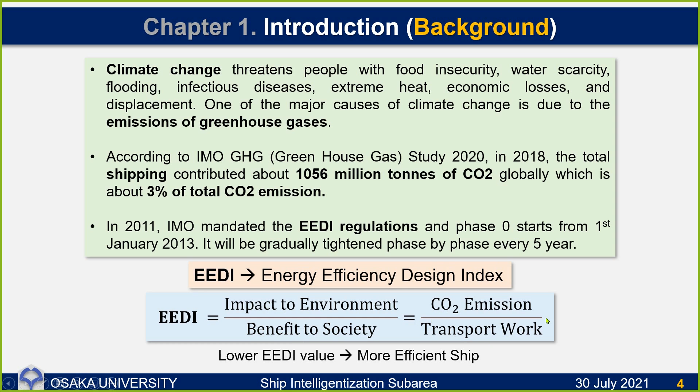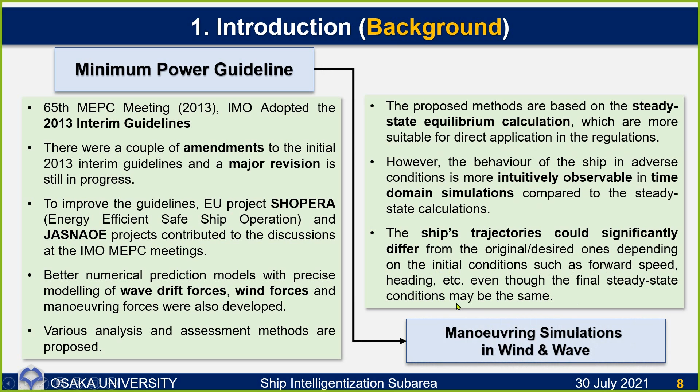Better numerical prediction models with precise modeling of wave drift force, wind force, and maneuvering force were also developed. Various analysis and assessment methods were also proposed. The proposed methods are based on steady-state equilibrium calculation, which is more suitable for direct application in regulation. However, the behavior of the ship in adverse weather conditions is more intuitively observable in time domain simulation. Moreover, the ship trajectory could significantly differ depending on the initial condition, like forward speed and heading, although the final steady state condition may be the same. Therefore, maneuvering simulation in wind and wave becomes important.

Now, chapter 2, maneuvering model. For the maneuvering model, a modular modeling approach is used. The ship is divided into different systems: hull reaction forces, steering system, propulsion system, as well as environmental wind and wave forces. Because this is a modular modeling approach, each system can be updated and replaced if a more accurate method becomes available. I also included the engine in the ship navigation control system, which will enable a wide range of maneuvering simulation scenarios.

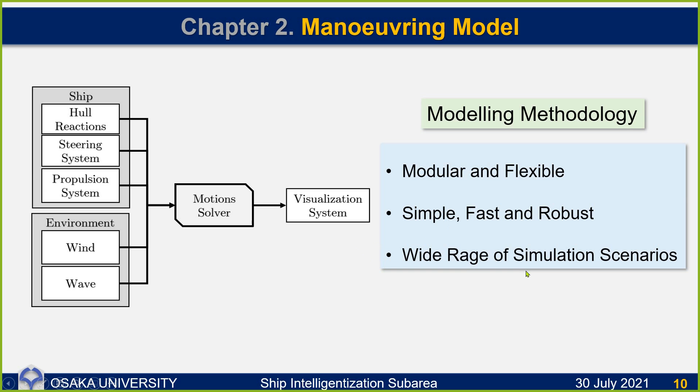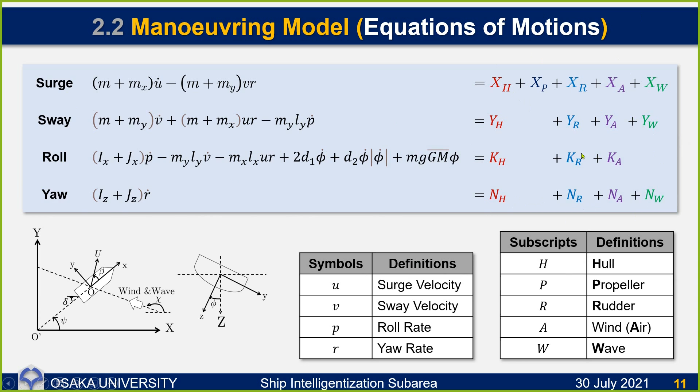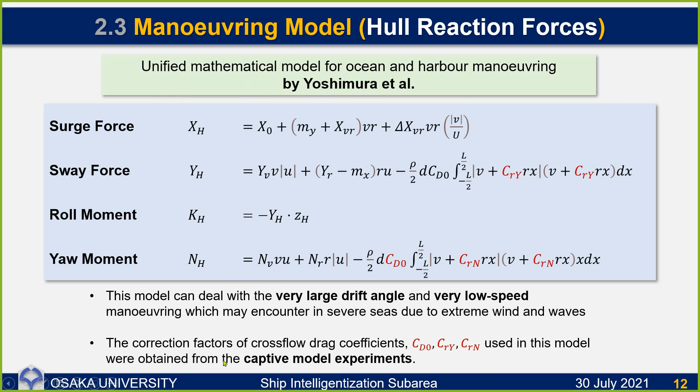This shows the 4DOF MMG equation used for the maneuvering model. Now I will explain the force and moment components on the right hand side. For the hull force and moment, the unified mathematical model for ocean and harbor maneuvering proposed by Professor Yoshimura is shown here. This model can deal with very large drift angles and very low speed maneuvering, which may be encountered in severe sea conditions. The correction factor for the crossflow drag coefficients used in this model was obtained from captive model experiments.

This shows the arrangement of the propulsion system and the propeller. The propeller module generates thrust as shown here, and the propeller is connected to the engine via a shaft, with the engine controlled by a governor. The operator specifies the desired RPM here. The governor also includes a fuel limiter, which ensures the engine operating point stays within the specified limit. The shaft dynamics equation is shown here.

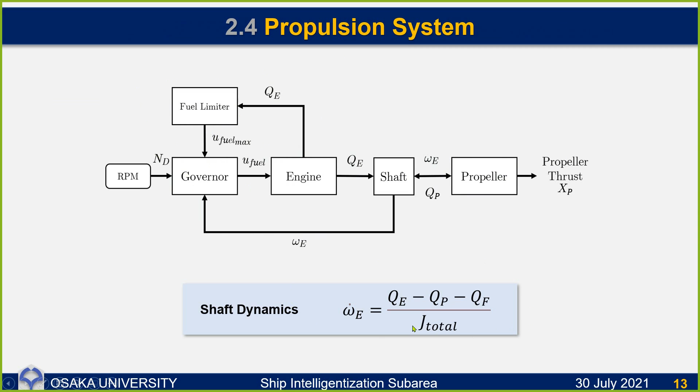Propeller thrust and propeller torque are calculated from the open water propeller chart as shown here. For the engine torque, it is shown that the engine torque is proportional to the amount of fuel supplied into the engine, and the proportional coefficient can be calculated from the specified MCR point as shown here. The friction coefficient is shown and is negligible.

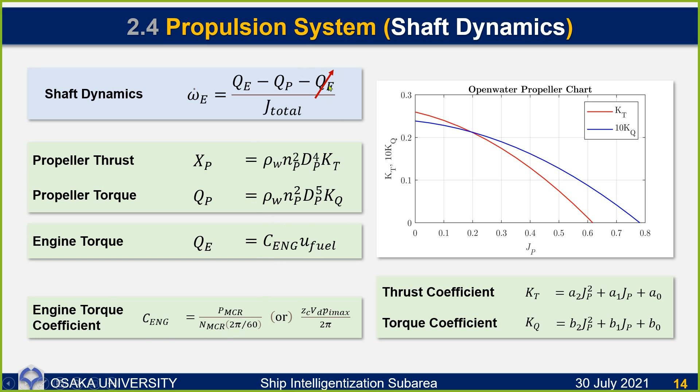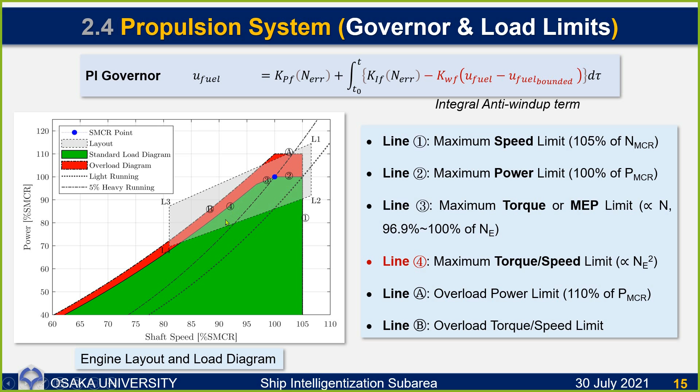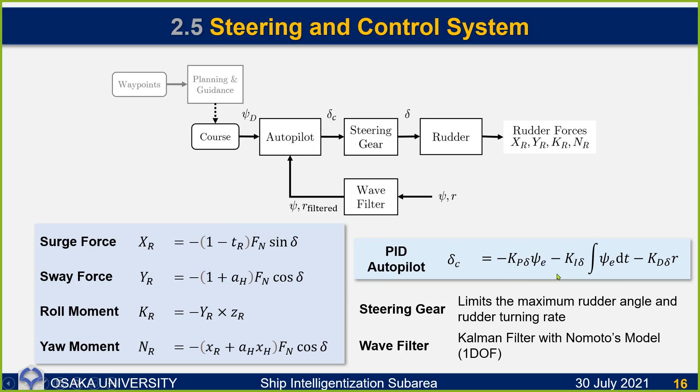For the environmental force, first the Beaufort number is defined here, with corresponding wave height and wind speed given in this table. In the environmental force, wind force and wave force are considered. For the wave forces, there are two components.

The first is the second order wave drift force, and the second is the first order wave force, which is the oscillatory motion.

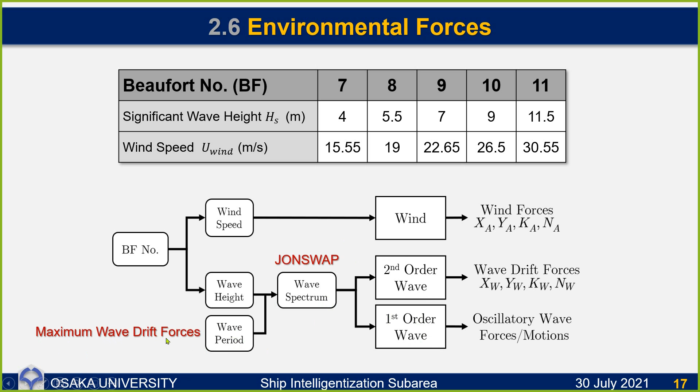For the wave spectrum, the JONSWAP spectrum is used. For the wave period, the period is chosen at the maximum wave drift force around the healthy condition.

This shows the wave spectrum here. For the directional spectrum, a cosine square function is used.

Wave forces are calculated for both long-crested and short-crested waves. But when comparing these two forces, the long-crested waves are larger, so for the simulation, long-crested wave force is used.

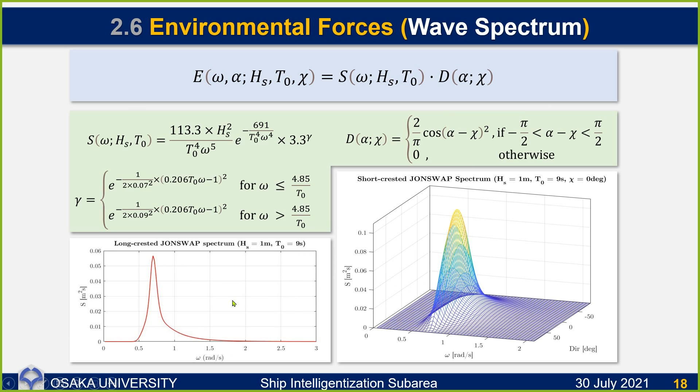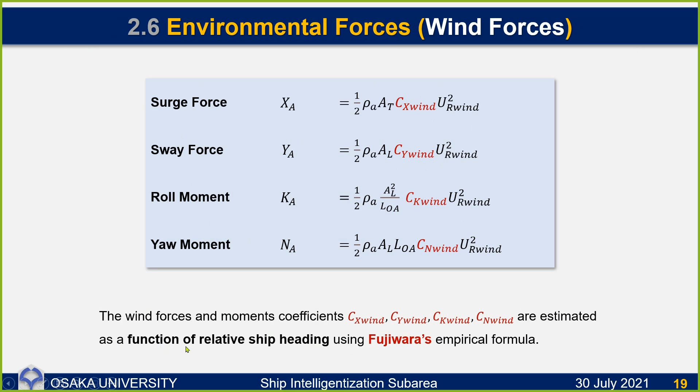For wind forces and moment, these equations are used. In this equation, the wind drag coefficients are estimated as a function of relative ship heading using the Fujiwara empirical formula.

For the wave drift forces, they are calculated assuming they are proportional to the square of the wave height, as shown here. This is the wave spectrum, and this is the wave drift force in regular waves, which is then integrated over all frequencies and directions, as shown here. The irregular wave drift force is calculated here.

For the second order forces, the wave drift force uses slender body theory with a Kochin function, calculated by the strip method. For sway force and moment, I use the linear 3D panel method with the Green function for zero forward speed.

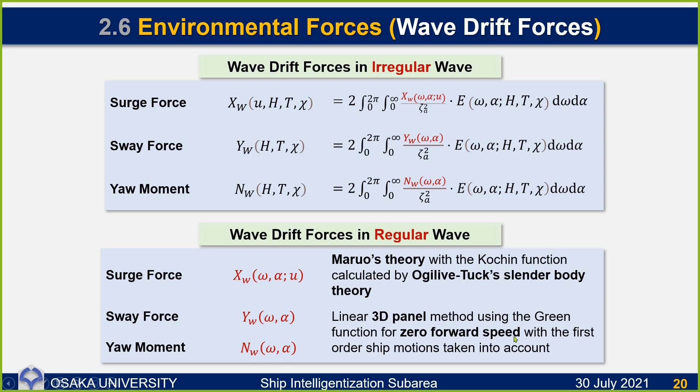For the first order wave, instead of using the first order wave forces directly, I use the first order wave motion, because these are linear forces and motion RAOs are readily available. Using the wave information and the motion RAO data, the first order wave motion in six degrees of freedom can be calculated using the superposition of different contributions from different wave frequencies.

For the propeller and rudder emergence, from the previous information I can obtain the ship motion of the center of gravity. By using this information, I can obtain the instantaneous propeller and rudder position.

Moreover, I can obtain the wave elevation at the propeller and rudder location using this equation. By using this information, the amount of propeller and rudder emergence above the water can be calculated, after which the thrust and rudder force reduction factors can be obtained.

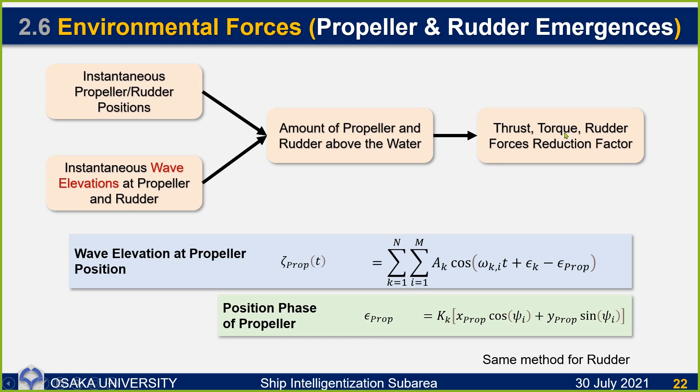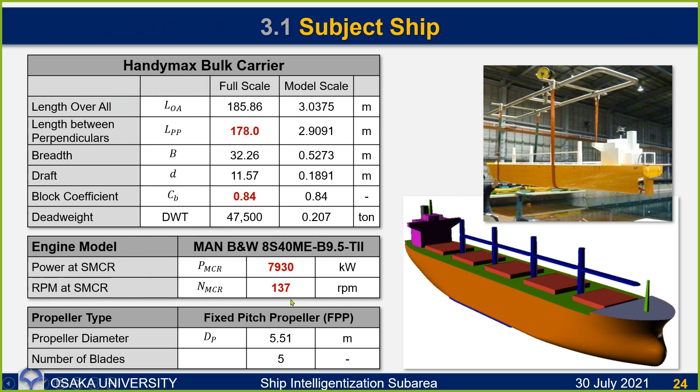Now, subjects in the validation. The subject in this study is the handymax bulk carrier, and the hull form of this ship originated from the KVS62, which is modified to have a block coefficient of 0.84. The engine used for this ship and the propeller are given here.

First, validation. I will show the validation at zero speed and propulsion equilibrium, and the validation is only done in the surge equilibrium.

Because of this oscillation, I consider the rudder thrust to be around 10% of the propeller thrust.

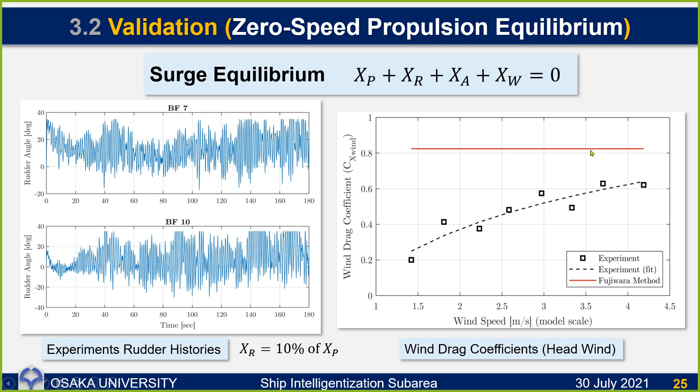For the wind forces, this shows the measured wind drag coefficient compared with the Fujiwara empirical estimation. The Fujiwara empirical estimation is more conservative here.

This shows the result of the zero speed equilibrium RPM for different weather conditions. For wind force and moment, I used the measured parameter for wind drag coefficient, as well as both Fujiwara and the experimental fit, as shown here.

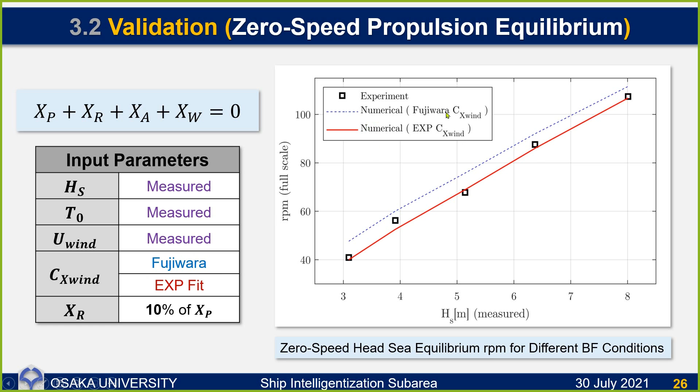The numerical result with the experimental wind drag coefficient shows good agreement, and as expected, the Fujiwara coefficient gives a slightly more conservative result.

Now, validation for the first order wave motion. To validate the first order motion in irregular seas, I selected one of the previous experiments. This experiment was not specifically designed for this purpose, but I selected it to show some validation of the first order wave motion.

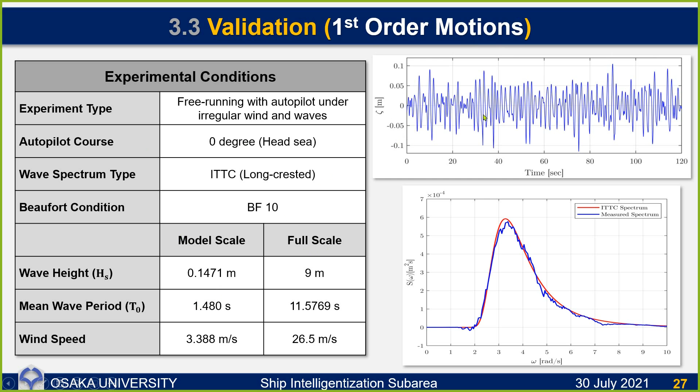This is the wave elevation history during the experiment, and this is the wave spectrum.

This is the trajectory of the ship during the experiment. The autopilot heading was specified at 0 degrees, but as you can see here, the actual heading is not 0 degrees.

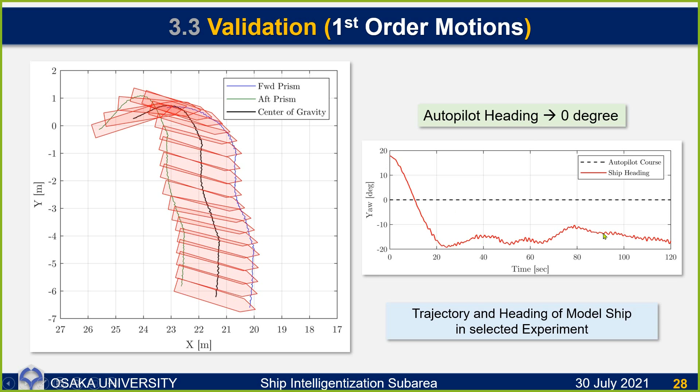This shows the validation of the heave motion here. It shows good agreement between the experimental heave motion and the heave motion calculated from the motion RAO.

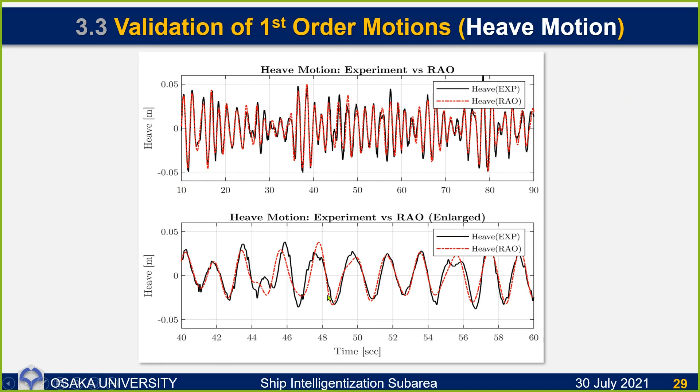This is because the RAO motions are calculated without the rudder, and also during the experiment the rudder was oscillating, as I showed previously. This discrepancy might be due to that.

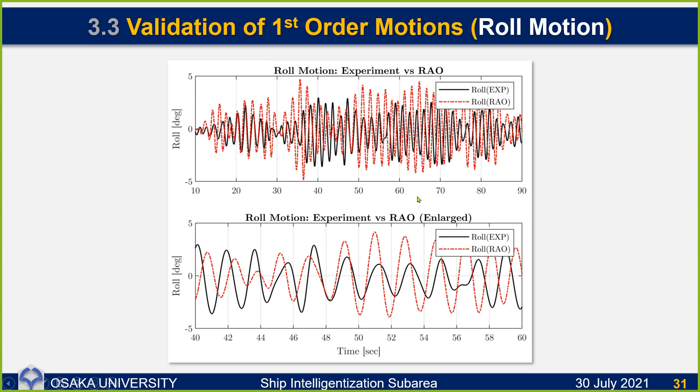Now I will show you the maneuvering simulation. The first scenario is inspired by the grounding accident of the Pasha Bulker at Nobbys Beach, Newcastle Port.

Before the accident, the ship was at a beam sea condition, and then the shipmaster tried to turn to head seas to avoid the grounding, but it was unable to turn and finally grounded.

In the simulation, the ship will start at the beam sea condition and turn to head seas using the autopilot. I executed 4 different types of comparative simulation.

The first compares with and without propeller and rudder emergence. The second compares different weather conditions. The third uses different initial forward speeds. The fourth compares different engines.

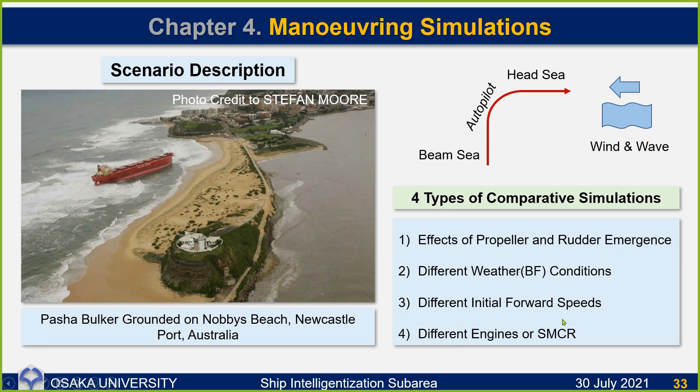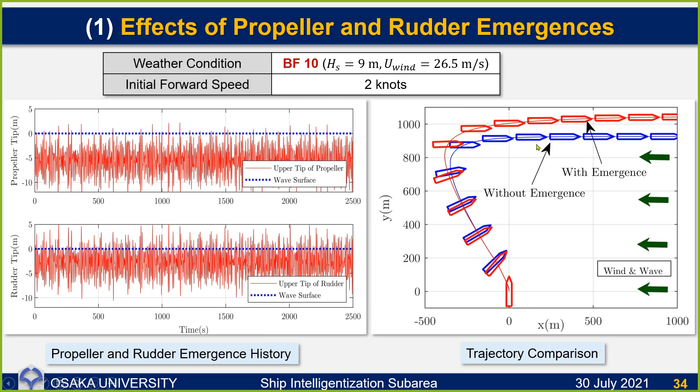But if you look at the ship speed, it is not too much different, because the propeller emergence is not severe — only the trajectory shows the difference.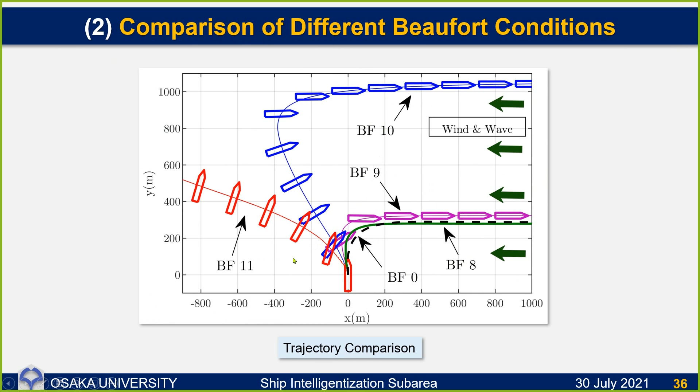At Beaufort 10, there was significant drifting. At Beaufort 11, the ship was unable to turn to head seas.

If you see the ship speed graph here at the Beaufort 10, even though it was able to turn to the head seas, the speed is nearly 0. In the Beaufort 11 condition, regardless of the maximum rudder effort, the ship was unable to turn.

If you see the engine power develop graph here, in the Beaufort 10 and 11 the engine power developed is smaller than other weather conditions, because in this condition the loading on the propeller is very high, and also the engine limit at this propeller RPM is lower, so the fuel limit is lower than other conditions.

This shows the effect of initial forward speed in the time domain simulation. So in this simulation, I started with different initial forward speeds and did various simulations. In this condition, it showed that depending on the initial forward speed, the ship trajectories are significantly different.

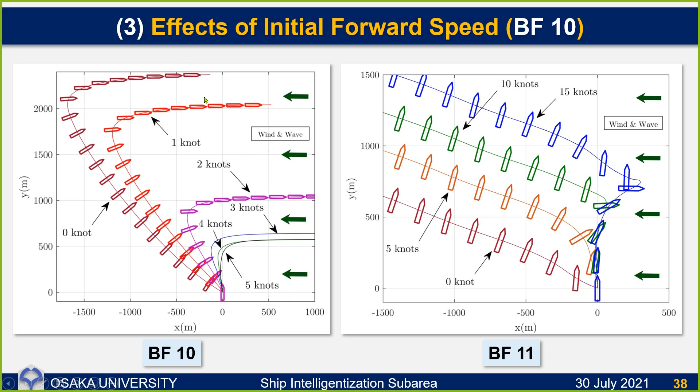But if you compare the ship forward speed at the final condition, they are exactly the same. So if the ship is operating in restricted water, this might have a significant impact. In the steady state calculation, this won't show this kind of result.

Another one is the fourth simulation. For the fourth simulation, I compare 4 different engines, with 3 additional engines shown here. The first one is the original engine, which is optimized for the original design speed. It has the 5% light running margin. It is shown as the blue dot here.

What is the light running margin? Light running margin is the light reserve engine power for the heavy loading condition. And this is the light running propeller curve. The original engine is chosen like the 5% from the light running propeller curve.

And then the second engine has the highest power within this layout diagram. This dotted line shows the layout diagram. When the base engine model is selected, the layout diagram is fixed. You can choose any MCR point within this layout diagram. For the second engine, I choose the highest MCR point here.

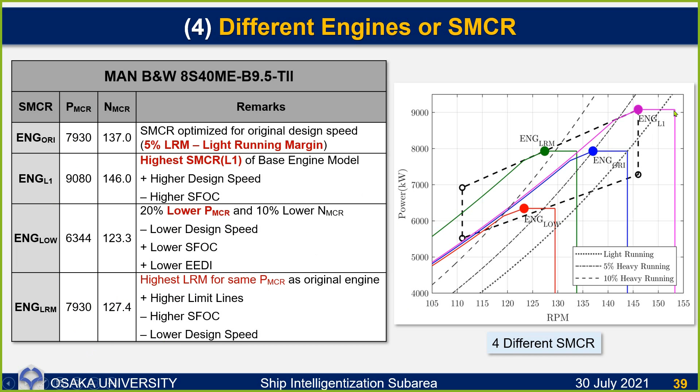The third engine has lower engine power, 20% lower than the original engine. I choose this engine because, due to EEDI regulation, a designer may decide to reduce the propulsion power. The 4th engine is the highest - it has a higher light running margin, and it has the same power as the original engine. It has the maximum distance from the light running margin as shown here.

This table shows the comparison of the EEDI value and the light running margin for the 4 different engines. The lower power engine has the smallest EEDI value as shown here, and the higher power engine has the higher EEDI value as shown here. The 4th engine has a slightly larger EEDI value than the original engine because, although they have the same power, the higher light running margin gives it higher specific fuel oil consumption. If you compare the light running margin, this one has the highest.

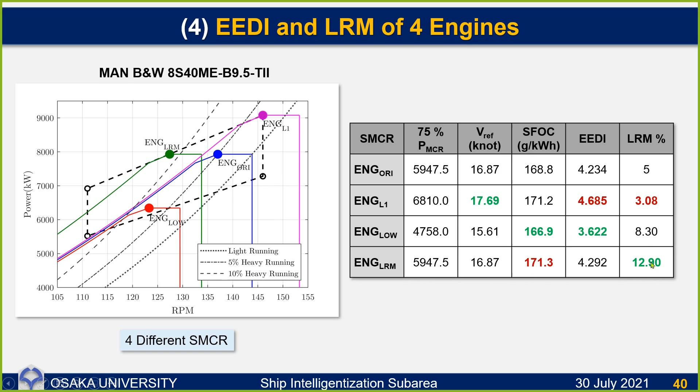So this is the simulation result, using different engines here. The blue line shows the simulation with the original engine, and this one shows the higher power engine. It has a little better trajectory here.

The lower power engine cannot maneuver the ship to the head sea, as shown here. This engine, with the highest light running margin, shows the best and safest trajectory here. This engine and the original engine have the same engine power, but because of the higher light running margin, this shows a safer result here.

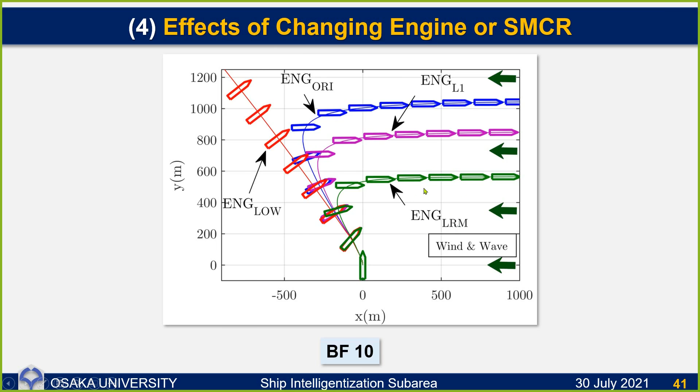This shows the time series - if you check the ship speed, the ship with the engine with the higher light running margin has the higher speed among all the engines, as shown here. Also for that engine, the RPM can reach up to the specified RPM, and there's not too much deviation.

The engine operating point is within the limit all the time. For the other cases, like the original engine and the higher engine power, because of the lower engine envelope and lower engine limitation, it cannot use its full power, as shown here.

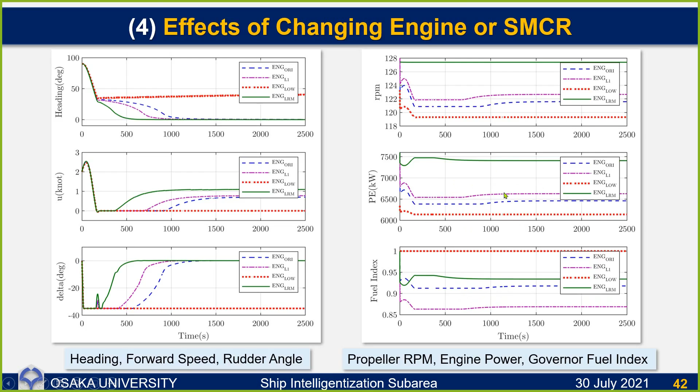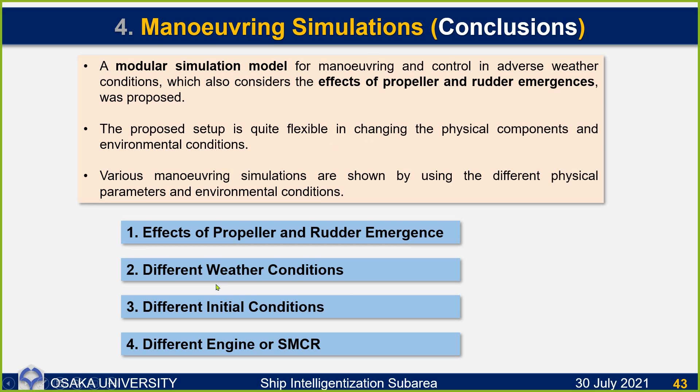So this is the conclusion for the maneuvering simulation. A modular simulation model for maneuvering control in adverse weather conditions is developed, and the effects of propeller and rudder emergence are considered. The proposed model is also flexible in changing physical components and environmental conditions. Various maneuvering simulations are executed with different physical parameters and environmental conditions. 4 different simulations are done.

When comparing the effects of propeller emergence, the ship speed is not significantly affected by the emergence because the emergence events are not very frequent, but there's some difference in the trajectory because of the rudder emergence.

Engine overspeeding doesn't occur because the governor was fast enough to compensate for the sudden engine speed jump. Engine overspeeding is more likely to occur in beam and stern quartering waves, because in heavy waves the propeller RPM is already low due to heavy loading, so overspeeding is less likely.

All these simulations are done under the ideal condition with the simplified model. So, I cannot take account of all the possible effects, especially the engine dynamics and something else. So, in the real situation, there may be some differences.

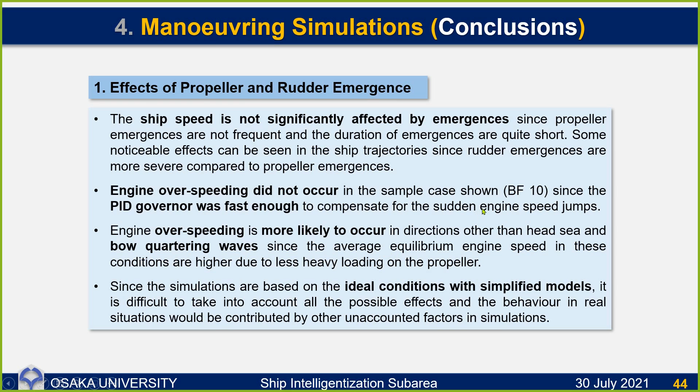For the different weather conditions, the ships were able to turn to the heading up to the Beaufort 10 condition, but with a very small final speed. In this situation, in the real situation, the rudder angle will be controlled by the human with discrete form, and the exact wind direction is not easily accessible. In this case, the human control will be less efficient.

When comparing the different initial conditions, even though the final steady states are safe, the ship trajectories are significantly different. So if I use different initial headings, the ship trajectory also will be more or less significantly different.

Therefore, when assessing the safety of the ship in adverse weather conditions, not only the equilibrium ship speed, but also the ship trajectory is important, especially when the ship is operating in a restricted area.

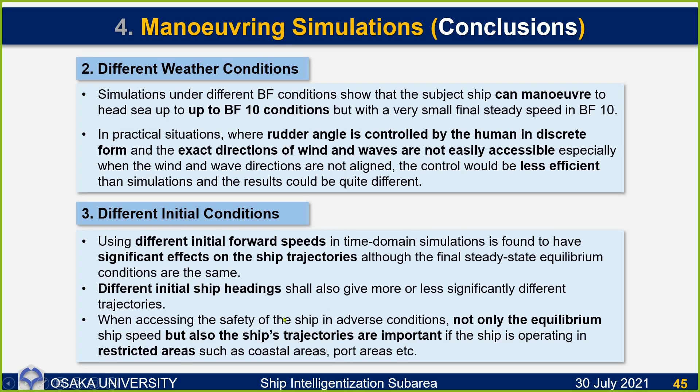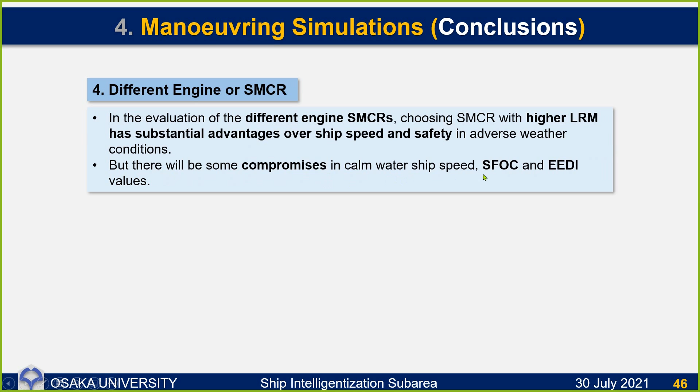When comparing the different engine or SMCR points, the engine with the higher LRM gives substantial advantages over the ship speed and safety, but there will be a compromise in the ship speed as well as fuel oil consumption and the EEDI value.

Now the second part. In the second part, I studied the ship automatic control strategy. In adverse weather conditions, the ship is usually controlled manually, but the manual control is not very precise. So in some cases, automatic control will be more efficient.

In this study, I studied 3 different control strategies: first, heading autopilot alone, then path following guidance, and then optimal path planning. First, autopilot alone.

This shows the setup of the autopilot control alone. The autopilot will calculate the rudder angle for the ship, and the operator will specify the desired heading.

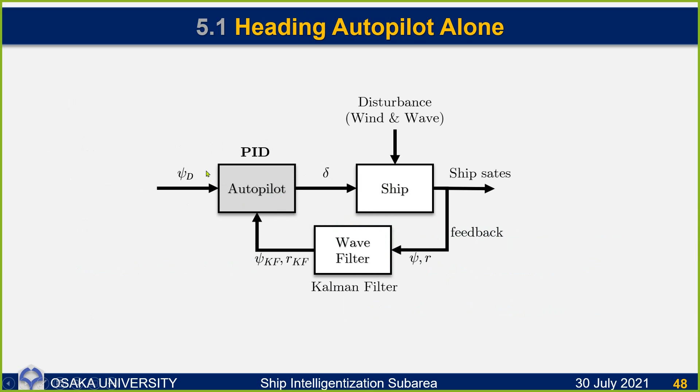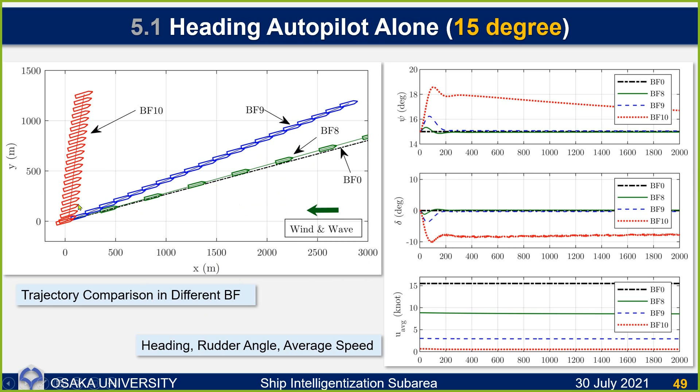This shows the simulation result of the autopilot alone for the course keeping maneuver, under the different weather conditions. Starting from Beaufort 9, the ship shows some drifting, and at Beaufort 10, the drifting is very large.

This shows the simulation result in the Beaufort 10 condition for the course keeping at different oblique angles. It shows significant drifting in this Beaufort 10 condition.

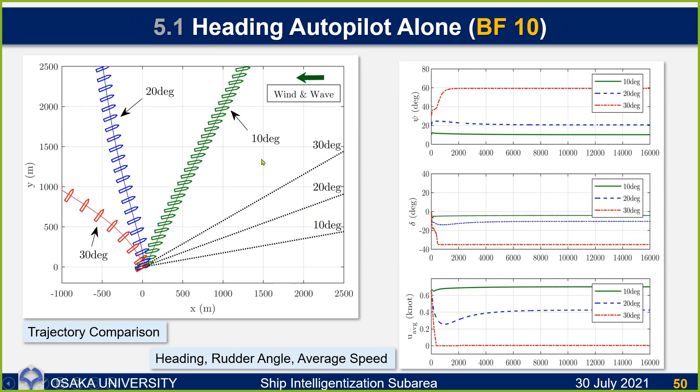So now to eliminate this significant drifting, I added another layer guidance system over the autopilot. The guidance system will calculate the reference heading for the autopilot by using the waypoints in the path set and the safe, straight line path specified by the operator, and the feedback to the guidance system is the ship's current position, which can be measured by the GPS sensor, etc.

So this shows the design of the LOS guidance, where LOS means line of sight. Let's say we have two waypoints connected by a straight line. We want the ship on this line, but here there is a cross track error - the ship is not on the line.

So the line of sight guidance calculates the desired heading by combining these two angles - this angle here and this angle here. This angle is calculated based on the cross track error from the line, and the look ahead distance specified by the operator. This look ahead distance will serve as the tuning parameter for the guidance system.

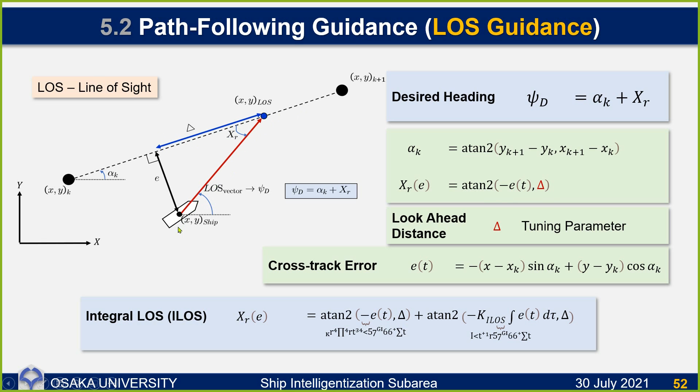So depending on this distance, the ship will move to the path aggressively, or it will move slowly.

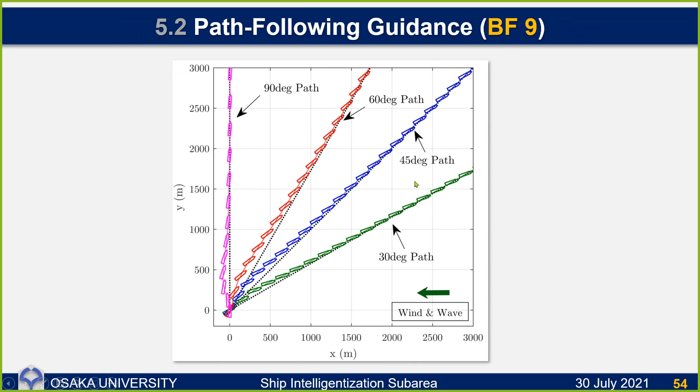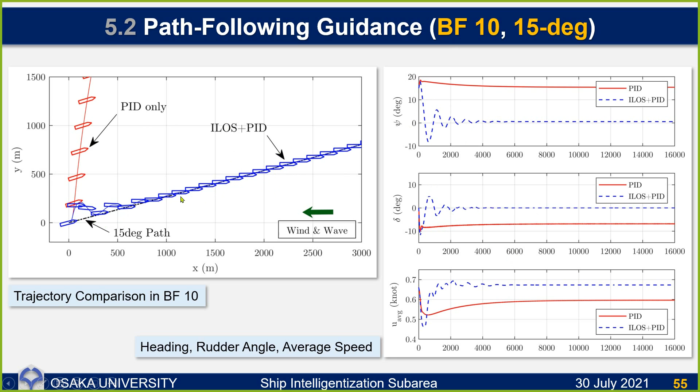This shows the path following for the Beaufort 10 condition. With PID only, there was significant drifting. With ILOS+PID, the ship was able to follow the path, and the ship's heading is nearly 0. In case of ILOS+PID, the rudder angle is also 0. This means that it's using the drift forces to keep onto the path.

This shows the path following simulation for Beaufort 10 for different paths. The ship was able to follow the path up to the 25-degree path. Beyond that, the ships were unable to follow the path regardless of the maximum rudder angle.

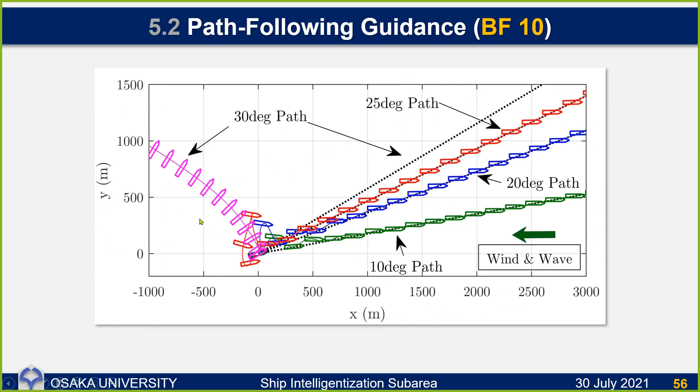Up to this point, the collision-free safe path is specified by the user to the guidance system. So now in this session, I added the path planner, which will calculate the collision-free path for the guidance system. The operator only has to specify the initial and final position and then the obstacle on the path.

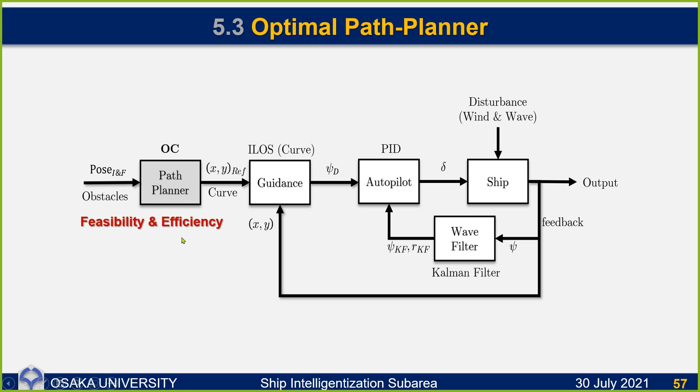For the path planner, I am using optimal control because in adverse weather conditions, the feasibility of the path and the efficiency of that path is very important. So that's why I'm using optimal control.

The optimal control is designed like this. There is a cost function to be minimized. In my case, the cost function is the minimum time. The cost function will be the minimum time path planning, and the ship will be subjected to different constraints.

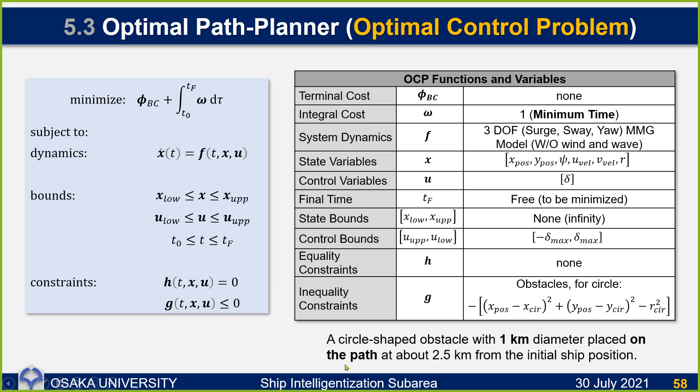The first one is the dynamic constraint that will ensure the generated path is feasible for the ship. Then there will be the main constraint, which is the obstacle. For this study, I was using a circular obstacle of 1 kilometer diameter that will be placed on the path about 2.5 kilometers from the initial ship position.

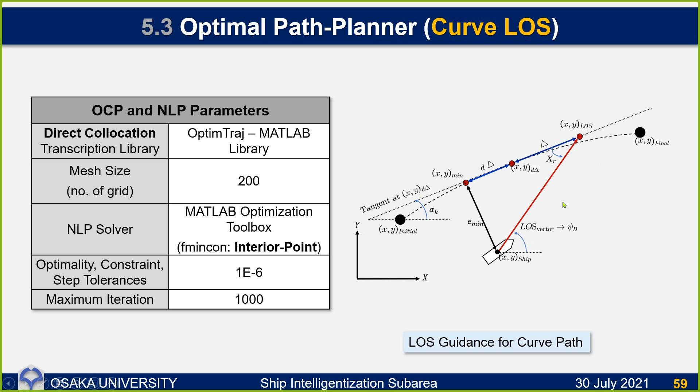This is the optimal control problem parameters in the optimization shown here. Because the generated path from the optimal path planner is a curved path, the LOS guidance is modified to be able to follow the curved path as shown here.

This shows the simulation result in the Beaufort 10 condition. In the Beaufort 10 condition, because of the severe wind and wave forces, the guidance system was struggling. As you can see here, there were some oscillations in the heading angles generated by the guidance system. Also, there were some deviations along the path as shown here.

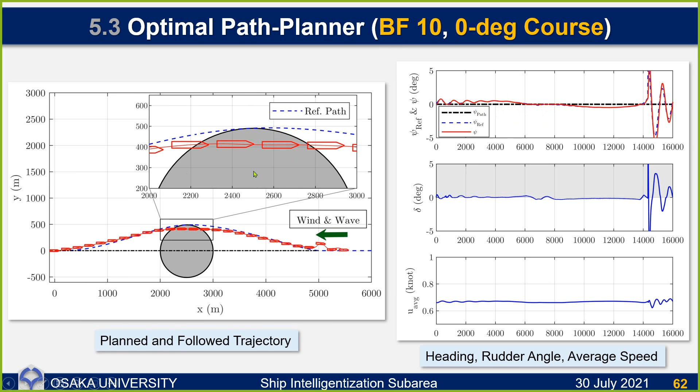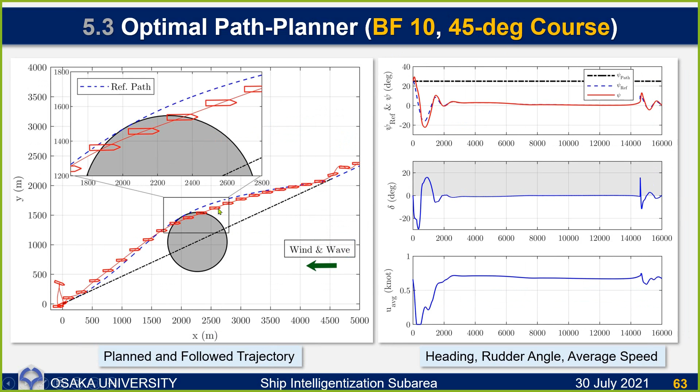So this is the conclusion for this session. The performance of the different control strategies was studied by using numerical simulation with the surge-sway-yaw coupled 3DOF MMG model.

In the case of autopilot alone, the conventional PID autopilot has a large drifting problem in high Beaufort numbers because its function is just to control the heading regardless of the ship position in the drifting.

By adding the LOS guidance as another layer over the PID autopilot, the ships were able to advance onto the desired path using the compensated reference heading angle for the autopilot.

During the simulation, head-sea path is found to be the least dangerous in bad weather conditions compared to other headings, because in the other oblique heading compared to the head-sea course, the sway forces and the yaw moment are larger on the ship.

When comparing the PID and the ILOS-PID path follower, there's no significant difference in the rudder command, although the ship trajectories are significantly disparate. This means the small difference in the rudder angle can give a significant difference in the ship trajectory in severe conditions.

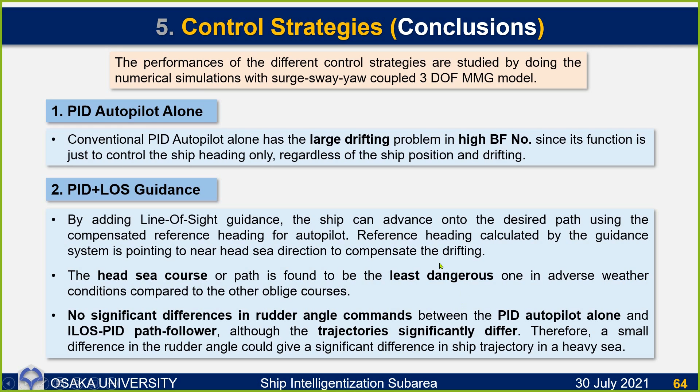So for the optimal path planner, I propose the collision-avoiding path planner using trajectory optimization in direct optimal control. For the simulation result in Beaufort 9, the guidance system had no problem following the generated path for all directions. But in Beaufort 10, the ship became somewhat course unstable, and the guidance system was unable to follow.

The guidance system was struggling to follow the path, and there were some significant deviations. For the larger oblique heading, in some cases, the ship was unable to follow the path regardless of the maximum rudder angle because of uncontrollable drifting.

So when comparing the PID autopilot path following cases and also the optimal path planner, early, small, and precise rudder movements were found to be useful when avoiding the obstacle under very large external load. If this rudder is manually controlled, the human operator cannot control with that precision. So in that case, automatic control might be more efficient than manual control.

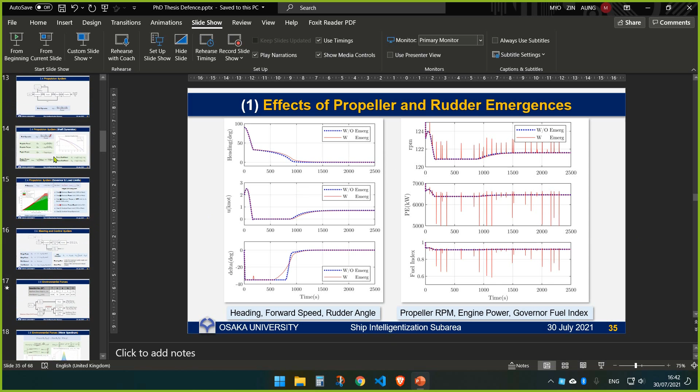So for this study, I use a simplified engine model. The RPM jump is coming only from this equation. So when propeller emergence occurs, the propeller torque will suddenly be lower, and then it will affect the rate of RPM, and the RPM spikes. But I did not consider the air pressure or temperature inside the engine cylinder. In that case, I should use a more sophisticated engine model. In this study, I'm only using the simplified engine model.

You are doing very good. Okay, thank you very much. But I think you should include some air drawing effect or something for the rudder and propeller, both rudder and propeller. Okay, thank you very much. Okay, I finished. Thank you, Professor.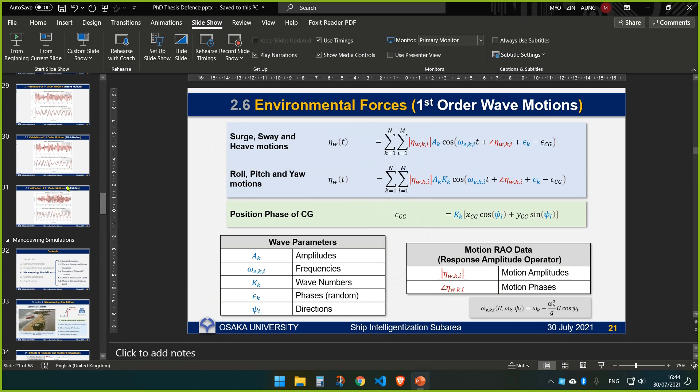So I would like to recheck something about the RAO in the sea-keeping stage. You showed that the pitch and heave motion were nice, but the roll motion was not so good. So then I missed here the reason for the discrepancy. So I think there is some non-linearity or something, but don't you think so? Or would you say otherwise? Could you explain?

Yeah, I think the reason is not just one. There might be several reasons. The first one is the motions are calculated for the bare hull condition, so there's no rudder moving behind the ship. In the experiment, the rudder is oscillating. As I showed here, the rudder movement could affect the roll angle. That is one reason. Another reason is there might be a nonlinear effect in the roll motion.

So yeah, I would like to say there are a lot of nonlinearities, but damping is one of the reasons, I think. Maybe you can include the effect of the nonlinear damping component in linear form, for example, so you can manually change the damping coefficient or something. There are a lot of ways. So maybe this is a good thing to enhance your results.

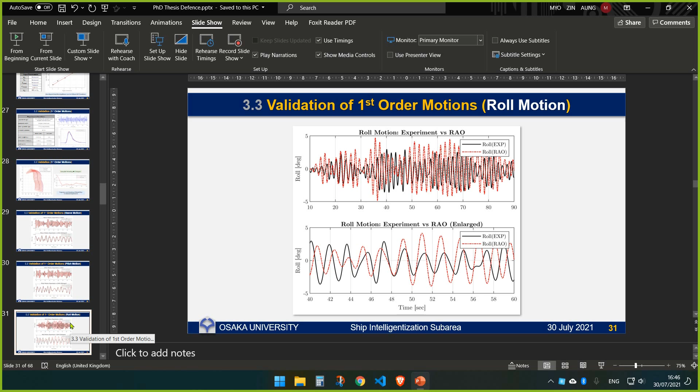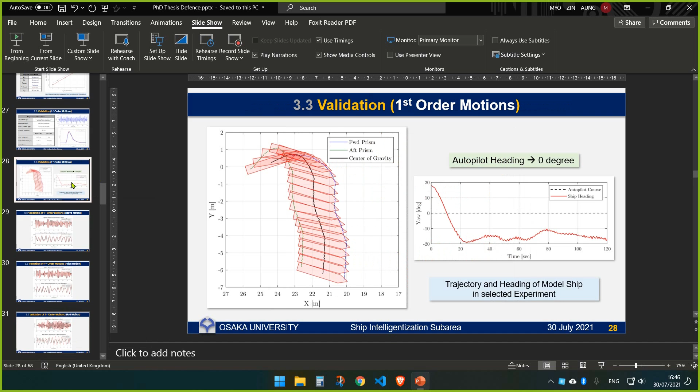Thank you very much. Okay, so this is one of the questions. The other question is, could you show me pages 25 and 26? Okay, this one. Yeah, so you kindly showed the discrepancy between the Fujiwara's method and the experimentally obtained wind drag coefficient. So how did you experimentally get the wind drag coefficient, CX wind?

This experiment was done, I think around 2014, by Professor Umeda Sensei, using the dynamometer and the wind blower. Yeah, so I imagine that this wind drag coefficient is coming from some free-running model data. Not free-running data. Just coming from the captive model test. Yes, his understanding is right. You're right. That's okay. Perfect, thank you very much.

Okay, so there is a huge discrepancy between the Fujiwara's methodology and actually measured ones. So how did you fill this gap practically?

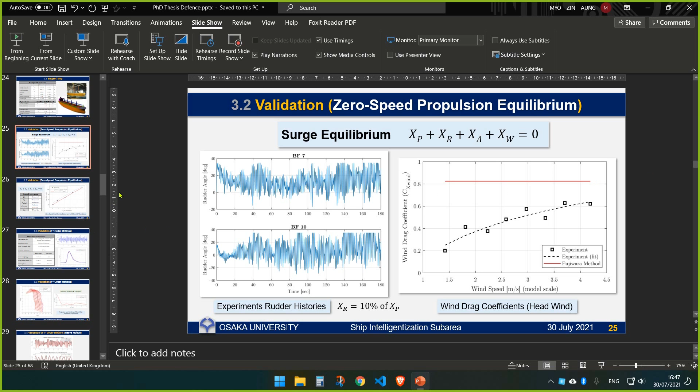When comparing the experiment and simulation results, using the experimental drag coefficient shows good agreement. But Fujiwara's coefficient is higher, so it shows a conservative result. In case of safety study, a conservative result is good, so there's no problem, but the Fujiwara empirical formula should be improved.

Maybe Fujiwara's regression formula was obtained from I don't know the exact number of ships, but maybe 20 ships or something. But the ship hull form used at that research was maybe not so new, some old shape of vessel. So maybe that's why the database should be updated. This is a nice outcome, I think.

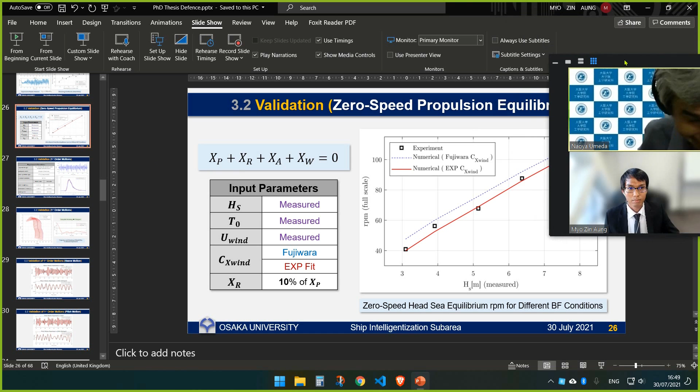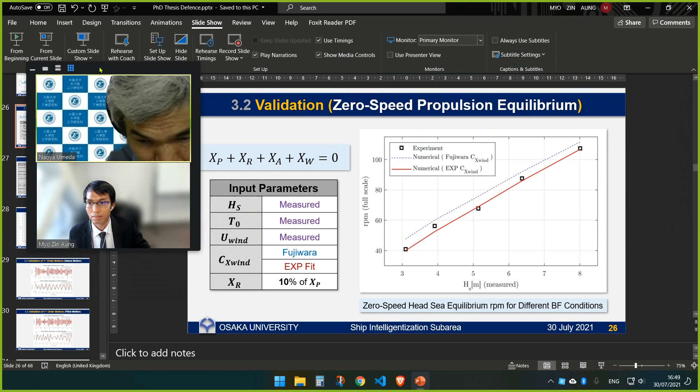If there is nothing, I would like to ask one thing about the wind moment, wind force and moment. Why? Just want to wait for another response. Okay, someone will make some comment.

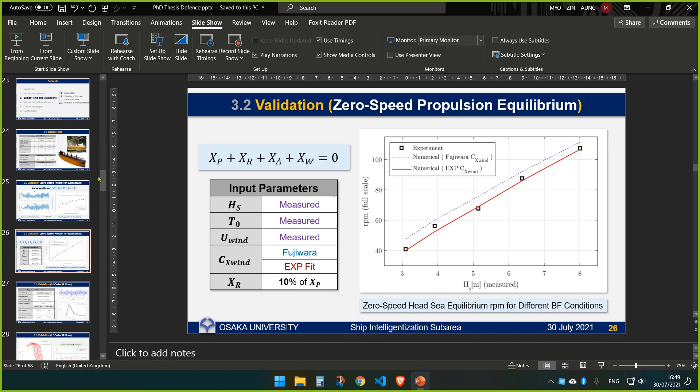We have many almost expert on the control, ship control. Dimas, you want to make some comments? No, sir, not in particular. Thank you very much. You know this content very well.

If not, I want to invite Mark Sensei. I changed my mind, I would like to ask you first about the control part. Oh, control. Yeah, alternative to Dimas-san, I would like to ask one thing.

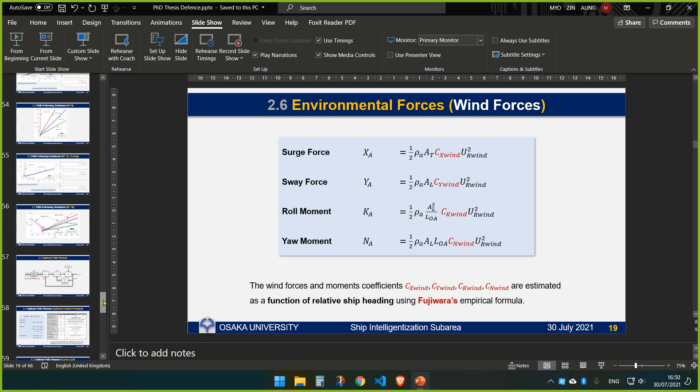You introduced the collocation method. Maybe you did not compare the collocation method and the direct shooting method. As you know, there are two methodologies, one is direct shooting and one is direct collocation. I used to love direct shooting, but recently I changed my mind. I love collocation method now because the optimizer has become nicer and accepts a lot of variables to be optimized. So the optimization ability of the collocation method has become better. Can you share some experience about the collocation method?

I did some comparison between the shooting and collocation methods. The problem with the shooting method is embedding the ODE, ordinary differential equation, in the optimization. To satisfy that ODE with a very small time step for the boundary constraint, it's very difficult to satisfy the boundary constraint in the shooting method. In the collocation method, all points are collocation points, so it's easier to satisfy the dynamic constraint at those points. This means it converges faster in the optimization. If I use the shooting method with a very coarse time step, it might be faster, but collocation results are generally superior when comparing results.

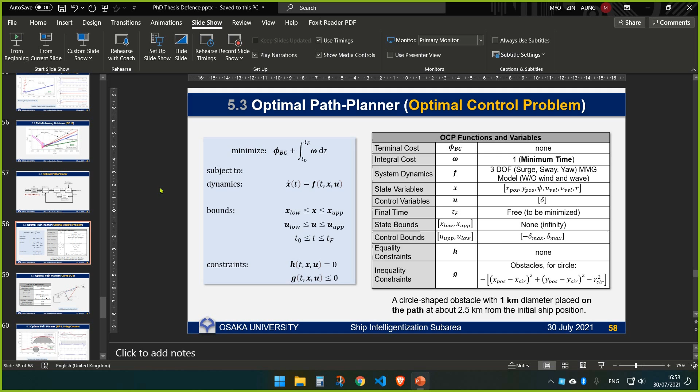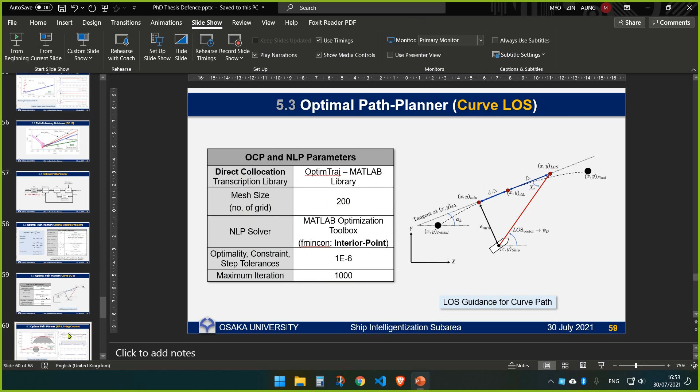In the collocation method here, the time steps are very large because the mesh size is only 200 - the whole trajectory is divided into only 200 parts, so the mesh size is very large. But when generating the path, we don't need very precise maneuvering constraints, because when following that path we have feedback control, which can eliminate that problem. The path generation part is not very precise, it's like a coarse path, but because of the feedback control, PID and LOS guidance, there's no problem I think.